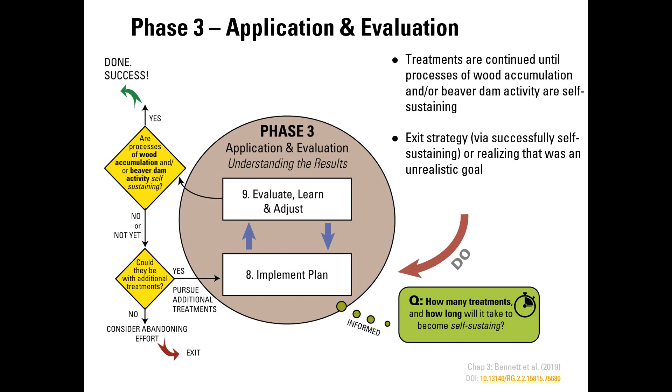So we're going to cover the logistics of implementation, some of the equipment needs you have, both general and more specific, safety considerations, and we're going to spend a little extra time on post pounding, the installation of posts, since it tends to be the area most people are least familiar with when implementing these sorts of projects.

Logistics are a really important part of LTPBR projects because they require a lot of moving parts, a lot of different people involved, different areas you might be working in, different equipment and material needs, etc. Managing these efficiently can be the difference between a smaller scale implementation and a much larger scale implementation.

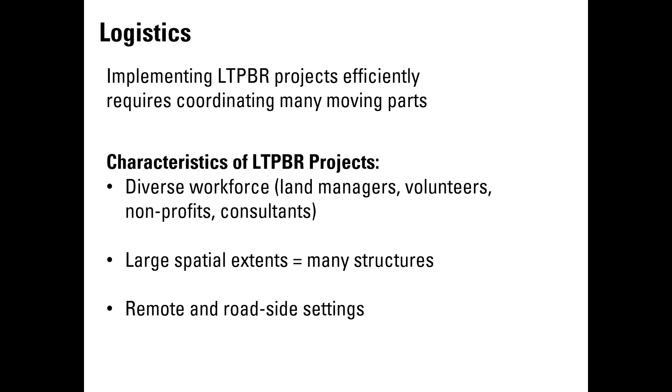Related to that, some characteristics we generally associate with LTPBR are diverse workforces, including land managers, volunteers, nonprofits, consultants, the tendency to treat larger spatial extents, meaning construction of many structures and a lot of material needs, and lastly, that these projects can be implemented in both remote or roadside settings, each with its own specific considerations.

So we're going to dive into each one of these separately: the workforce numbers and different training needs you might have, material availability and transportation, site access, seasonal closures you need to be aware of, and lastly whether or not you choose to use posts. All of these are going to be really important in efficient implementation.

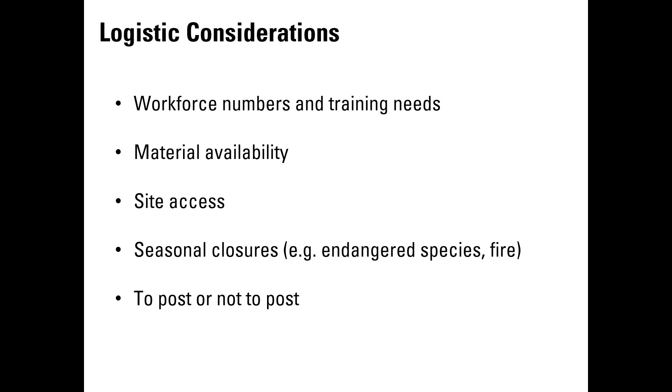First, workforce numbers and training needs. One of the great benefits of LTPBR projects is that they can engage and benefit from a pretty diverse workforce, including seasonal technicians, land managers, consultants, construction crews, and volunteers.

Just about everyone who can carry a bucket or a shovel can get involved in one way or another in these projects. Of course, what that means for those of us planning or managing projects is that we need to be aware of the different levels of oversight or training these individuals might have.

You can imagine if you've mobilized a group of 20 different individuals from diverse backgrounds, everyone brings different experiences to the table. That has important implications for safety, most importantly, but also simply for the efficiency with which you can implement.

Getting everybody on the same page with respect to the principles and safety considerations is going to be really important. This is particularly important because any workplace injuries, should they happen, have the capacity to really shut you down at worst, and at best just really slow down your implementation.

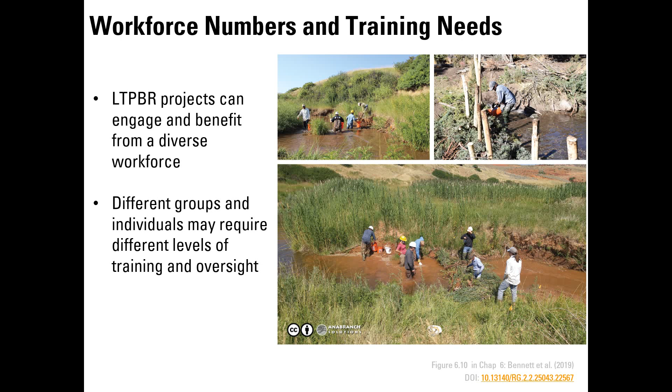The second very important thing to consider is your material availability. Is there an adequate source of woody material on site? Also, are there other local sources, for example other upland restoration projects that can contribute woody material?

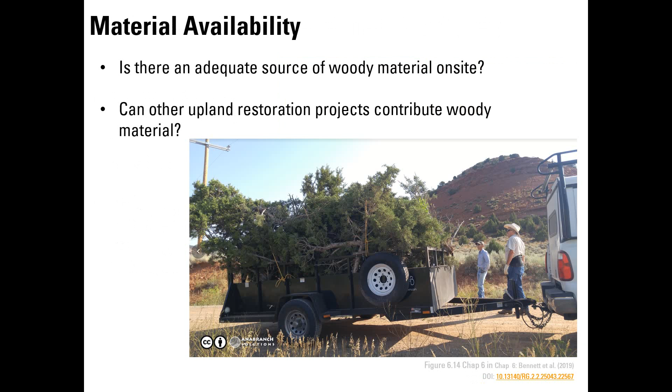Here what you see is a trailer full of juniper. In the West, we do a heck of a lot of juniper removal projects. Oftentimes, if you're fortunate enough to be working in an area nearby one of these, you can use some of this material for the structures you're building.

In areas where you don't have sufficient woody material, which is characteristic of a lot of degraded riverscapes, this can be a win-win for both parties and really increase the efficiency of your implementation.

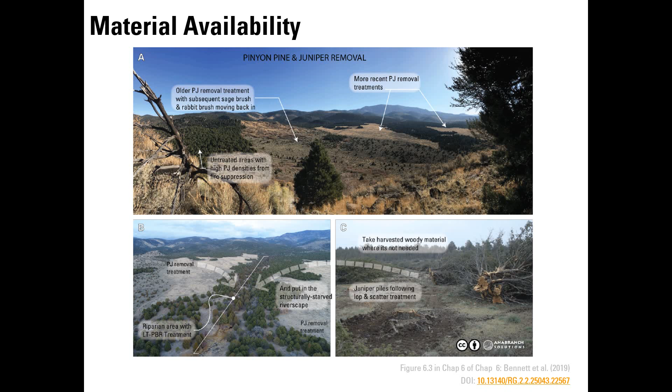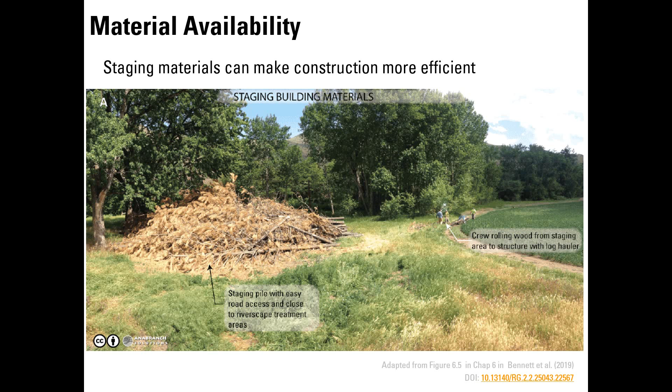Thinking about whether you can dive straight into the stream or whether you should be staging your materials. By staging, I mean collecting and storing materials somewhere prior to implementation. In projects with seasonal closures, staging can be a great way to start getting work done without actually getting into the creek. Staging can happen in large roadside piles, or at the scale of individual structures, since a major time sink for restoration projects isn't just building structures, it's getting materials on site. Moving materials earlier in the process can help speed things up later.

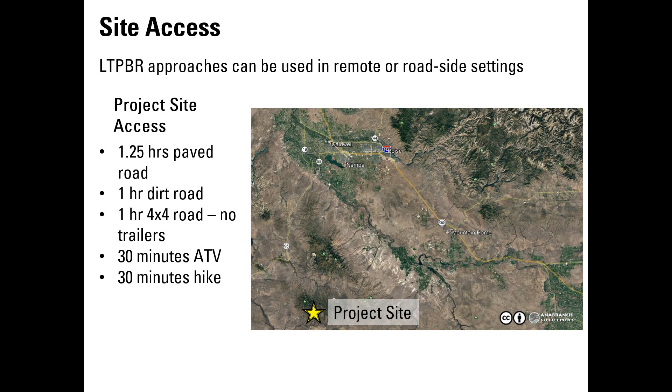Site access is a big component of that. Here's an example of a site in a remote setting, a little south of Boise. Accessing it required about an hour and a quarter on paved roads, another hour on dirt roads, one hour on a 4x4 road you couldn't take a trailer on, then 30 minutes on an ATV followed by a 30-minute hike, or for the more adventurous, an hour-long hike to the bottom of the site. That's very different from a project with roadside access the whole way, where you can drive your truck, trailer, and ATVs within 30 feet of the structures, to the point where you might leave your post pounder in the back of the truck. Both settings are appropriate for LTPBR, but they have very different planning, logistic, and safety implications, as well as major differences in overall project cost.

Seasonal closures are also something to be aware of. You can't just get your stream bed alteration permit and jump right in the creek. In many places, for many reasons, you might have closures that prevent you from working either in-stream or even on the floodplain. That requires consulting with federal and state agencies to understand what closures your specific project area might have.

A few examples: in the Price River in central southern Utah, there's a closure from June 1st through August 31st for the yellow-billed cuckoo, an ESA-listed species, so any work has to take place outside that window. In southeastern Washington, there's an in-stream work window of just 2.5 months, from July 15th through September 30th, for salmonids. So just check locally with whatever restrictions you might have.

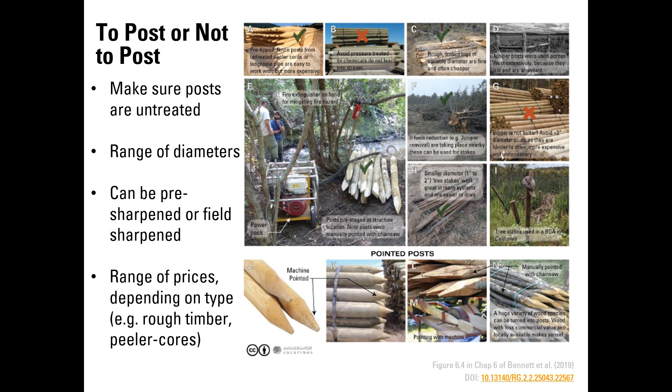All of these different moving parts are a great reason to use pilot projects. By pilot project, I mean a smaller scale project. In addition to being an opportunity to learn about the system's response, both geomorphically and hydrologically, pilot projects give an opportunity to address the uncertainties of complex logistics.

In general, these projects are going to be smaller scale and therefore more expensive on a per structure basis. But learning some of the ins and outs during a pilot project can make a full-scale implementation a lot more efficient, and therefore save that money back that may have been spent during the pilot.

One example from northwestern Utah in Grass Creek is that our pilot project consisted of only 20 structures across 3 different creeks. If you do the math, that's just under 7 structures per creek. But some of the things we learned in terms of site access, material availability, the need for posts, and the costs associated with moving different pieces of equipment helped us scale up to 6 times that number the following year.

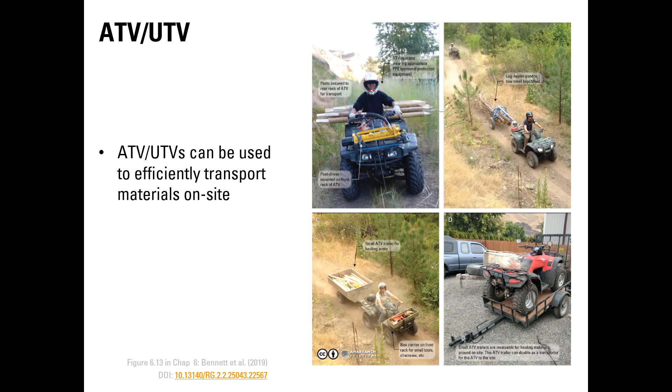You also might use ATVs or UTVs. These can be indispensable in making for a much quicker, more efficient implementation, both for transporting materials once on site and for moving over longer distances if you're trying to cover more ground on a daily basis. For example, if you can't drive your truck down those last couple of miles but you have an ATV, it saves you an hour's worth of walking.

Post drivers - there are a range of different post drivers out there. At its simplest, you could use a sledgehammer. At its most complex, you can use a tractor-mounted hydraulic pounder. In between, you've got a couple different options. These are just things to be aware of, and there's more information in the manual on all of these. It's going to depend on both the resources you have available, whether this is equipment you already own or can borrow, and budget concerns. Partially, it's also going to depend on what the site demands.

There are plenty of sites where a simple sledgehammer, manual post driver, or even a gas-powered post driver aren't going to be sufficient to install posts. We tend to use the hydraulic-powered, still manually operated, post pounder for most of our projects. It's quite heavy, and we'll talk more about that, but it tends to be the surest way to make sure that you can get your posts in.

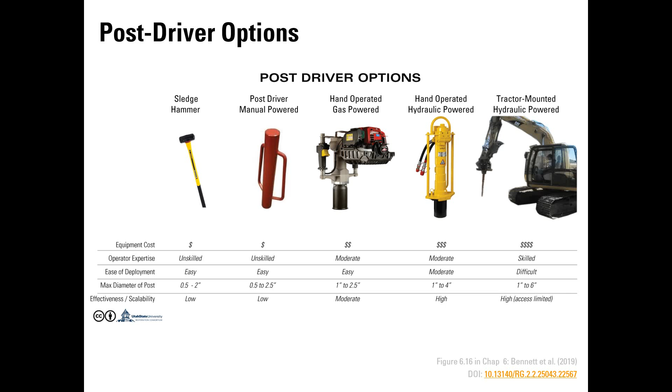If you have access to heavy machinery, you can explore that as an option, but it's likely going to be more challenging to get that kind of machinery on site. If you want more information on some of the specific different models available out there, you can check out Appendix A in Chapter 6 of the Design Manual.

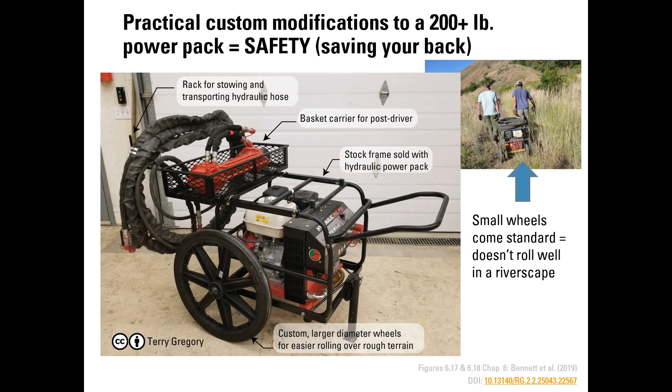When you buy a hydraulic post pounder, as shown here, there are still some aftermarket adjustments you can make to use it more efficiently in the field, because it wasn't designed for toting around in the woods. Larger wheels make a very big difference, for example. Also, building a small metal rack to house the actual post driver can really be helpful. A lot of the environments we're taking this equipment into are not the originally intended environment for this material, so a few aftermarket adjustments can make your life a heck of a lot more comfortable, safer, and easier.

Another piece of equipment that can be very useful in the field are boats or canoes. In areas where the floodplain is full of riparian vegetation, you might not be able to transport materials, most specifically the post pounder, through the woods, in which case having a boat or canoe to float it can be very helpful. I wouldn't recommend getting anything nice here - just get some old canoe that you don't mind dragging over rocks as you build. Make sure, of course, when you're doing this, that you don't build your structure with your canoe on the wrong side of it, so that you have to drag it over the structure afterwards.

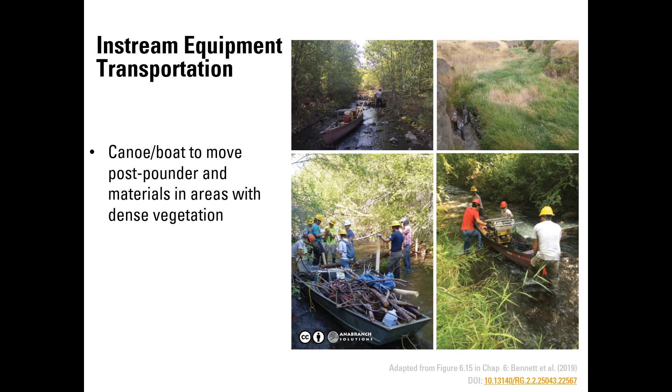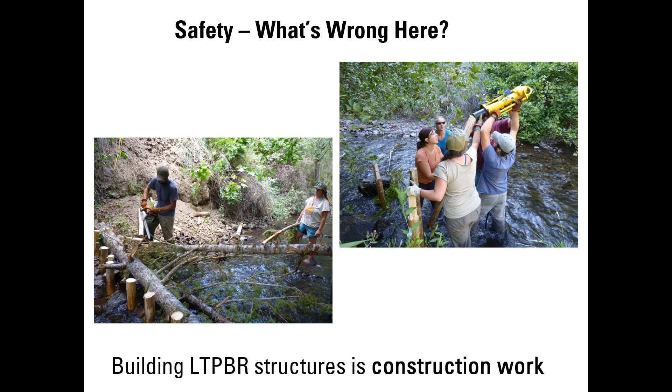Sharp sticks - we're carrying willow switches or large pieces of aspen that we've cut, so poked out eyes, cuts, bruises, splinters. We're always doing this work in slippery and uneven terrain, whether that's in the creek itself, on the floodplain, walking up and down banks. So now we're both carrying sharp tools and sticks over slippery terrain, so we're going to twist our ankles and then cut ourselves.

We're using heavy tools - the post driver is very heavy. Dropping a post driver on your foot will break it, especially now that we're walking over uneven terrain with sharp sticks and heavy tools. We carry a lot of long posts and pieces of wood, which means that when we have a lot of people in one space carrying really long objects, we've again increased the hazards for poked eyes, heads getting knocked by posts, etc.

We also use chainsaws, which means felled trees, which can lead to incredibly serious injuries. And finally, arguably the most influential on this list, is we're working with lots of enthusiastic people, which is a great thing, but also one of the most hazardous things we have to deal with, because we have lots of enthusiastic people who are felling trees, carrying long posts and heavy tools over slippery terrain with sharp sticks and sharp tools.

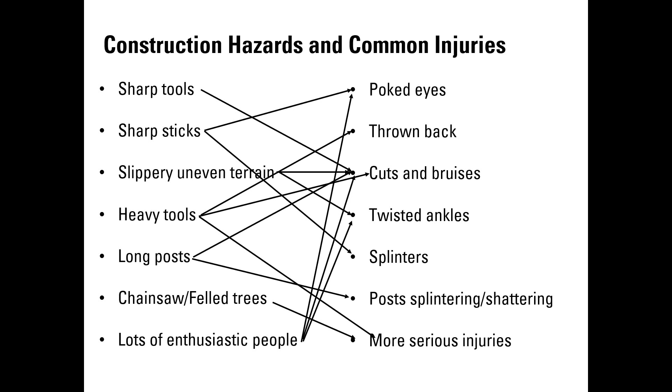All of these things can be mitigated, and that's really what some of the safety protocols we're going to cover are about. So broadly speaking, we can break safety up into a number of different categories: communication, appropriate training, recognizing environmental hazards, recognizing construction hazards, and personal protective equipment.

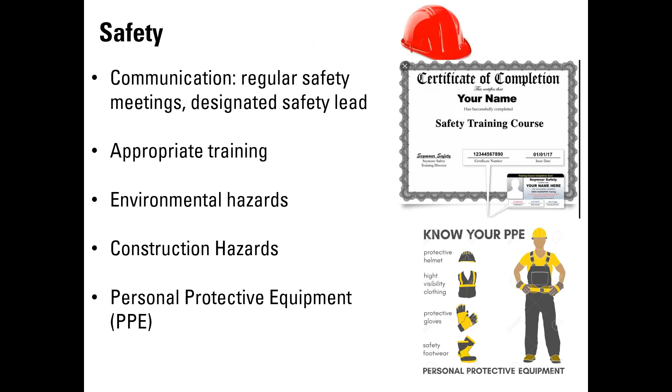Starting with communication. Different organizations and agencies have different safety communication strategies, and often these are formalized in either job hazard analyses, tailgate safety sessions, or morning safety briefings. There's a whole host of different ways we can do this. What's most important here is that you set aside some regular time to communicate all of the safety concerns that are part of working on these sorts of projects. That's going to include addressing the work site specific, activity specific, and environmental conditions on a regular basis.

Some of the things we do also require more specific training. The training required to use a shovel is different than the training required to run a chainsaw. So making sure that appropriate personnel have the training required for the task they're doing is critical. The most notable examples we have are chainsaw operation, driving, operating UTVs or ATVs, using grip hoists, and running the post pounder. I think it's safe to say that most people can be trusted to use a shovel, but unless someone has expertise and training running a chainsaw, they shouldn't be using one.

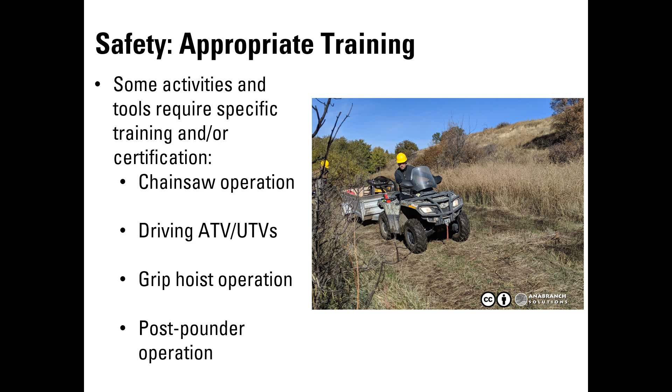Like the Postal Service, we can do this work in all different conditions. Acknowledging those environmental hazards is critical for the safe implementation of projects, because we work in rain, sun, heat, cold, snow, and all of these impact individual and group safety needs. This should be commonplace to those used to working outdoors, but it always needs to be explicitly acknowledged and mitigated for if necessary.

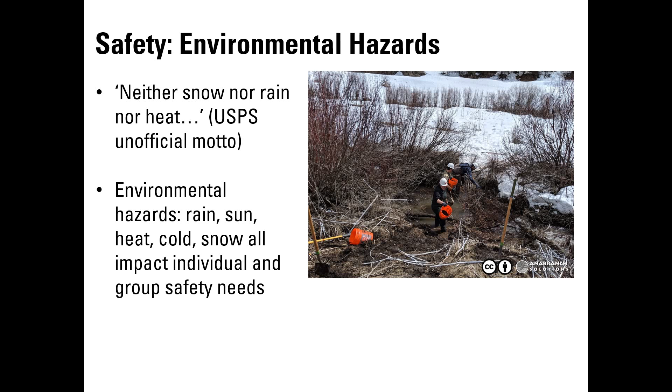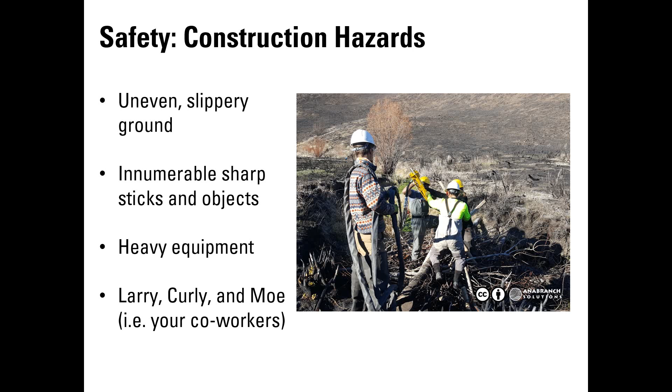We already covered a number of common injuries and construction hazards, but as a reminder, we're always working on uneven, slippery ground full of tripping hazards. We're using sharp sticks and objects, heavy equipment, and as I like to refer to them, Larry, Curly, and Moe - in other words, your co-workers. As much as you might adore your co-workers, you can't always trust them. So being aware of things like group spacing, pointing out unsafe behavior, and having someone in charge to keep their head up and look for unsafe behavior is really important.

Finally, personal protective equipment. When it comes to building low-tech PBR structures, this is the common suite of things we're going to need. We're going to need hard hats, which will help save us from getting whacked in the head by willows, posts, etc. We need glasses to keep us from getting our eyes poked out. We need ear protection because the post pounder or chainsaws are incredibly loud. And we're going to need gloves, because nothing will ruin your day or make you a less efficient or impactful worker than a simple sliver on your hand.

If you're running specialized equipment like a chainsaw or driving an ATV, there might be additional equipment you need - for example, chaps if you're running a chainsaw, and ATV-specific helmets if you're operating an ATV.

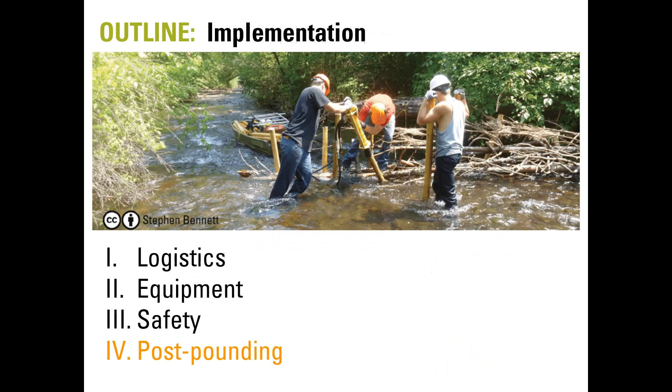Lastly, post pounding. The question is not how many people does it take to pound a post, but how many does it take to pound a post safely? Some context to answer that question: the driver, that piece of the post pounder that seats on top of a post, can be between 80 and 100 pounds. The hose itself is about 40 or 50 pounds - imagine a very cumbersome, difficult to maneuver rope. And the generator, or power pack, is about 200 pounds.

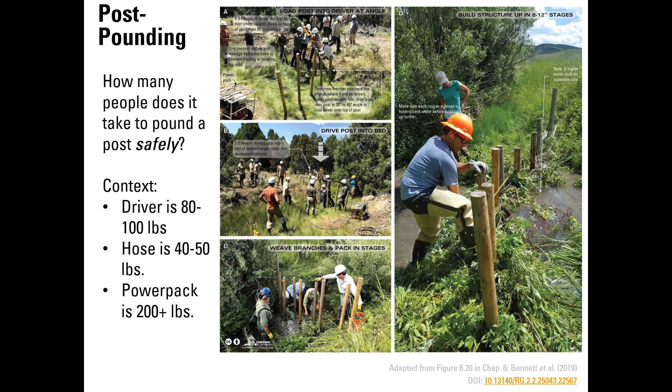How do we do it? This photo illustrates - you can see there are about 4 to 5 people actually involved in this process. There's one person manning the post, laying it down at an angle with their foot at the bottom, so the folks carrying the driver don't have to lift it above their heads. Because while a few of us might be able to carry the post pounder, and even fewer might be able to lift it above our heads, very few people, once it's above our heads, have any control over it. So having multiple hands on it is really important, and not lifting it above your head if at all possible is important.

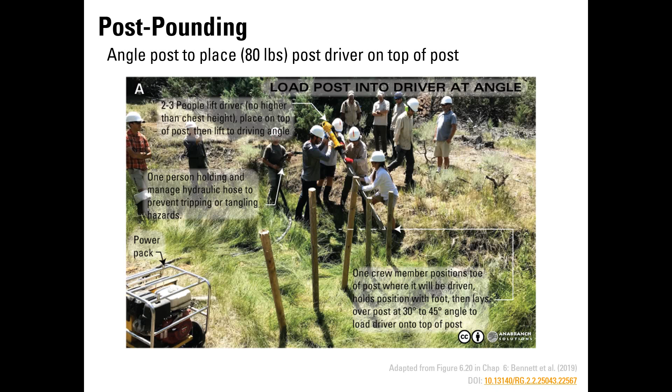Once the post driver is seated on top of the post, it can be pushed up using all parties - you can see a lot of hands on that post - and then driven into the bed. It's important to note the posts don't need to be vertical, something we've talked about previously, though in this case they happen to be vertical. Another important job here that sometimes is missed is someone simply holding onto the hose, because once you've lifted that post driver above your shoulders, the last thing you need is for it to get caught on some root behind you, which limits your ability to finally move it where it needs to go, and now you're in a very compromised position.

So the answer to the question, how many people does it take to pound a post, is about 4 or 5. That means someone who's moved the post into position, 2 to 3 people who have carried the post driver and got it on top of the post, and 1 person to manage the hose. In some situations, you might also have someone on the generator itself - that's both an important fire precaution and also convenient for turning the generator on and off.

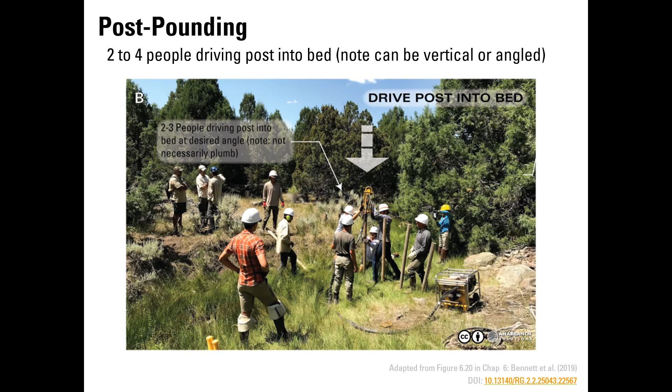In summary, effectively managing logistics can significantly increase your restoration footprint. It can be the difference between 50 structures or 100 structures, because for every moment you have 5 to 15 people standing around, that's a lot of work that could be getting done. LT-PBR projects rely on hand tools and manual labor, and all of this requires appropriate safety training and equipment.